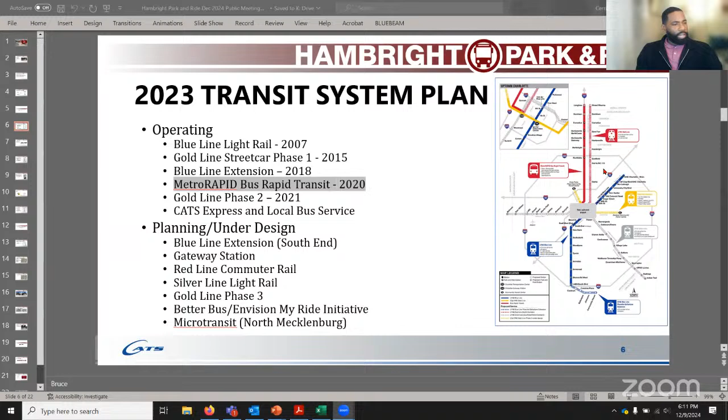Patrick, you can jump to the next one. So just to define what BRT is, this is an acronym some of you may be familiar with, but it stands for Bus Rapid Transit. The easiest way to think of it is bus, but providing the flexibility we see traditionally with some of our rail services. With a good bus rapid transit system, we have what we call dedicated right-of-way or a fixed guideway that we operate in. It's a dedicated lane or space that we can use to reduce travel times for customers. We can also use what we currently take advantage of with the MetroRAPID series, which is express lanes, and that helps reduce travel time as well, especially as we travel to and from some of the northern towns during peak hour, rush hour commute times. It is more reliable than bus service because you do have that fixed guideway, but it also provides limited stops in between. So the trade-off is the spacing is slightly further apart on bus rapid transit, but you do have more reliable service with a quicker commute time. You can go to the next one.

As I mentioned before, this is part of our overall strategy on how we can provide short-term rapid transit solutions to the northern towns. We developed the BRT plan, which includes enhancing our current level of service by providing additional park and rides that feed into direct connects, both existing and planned.

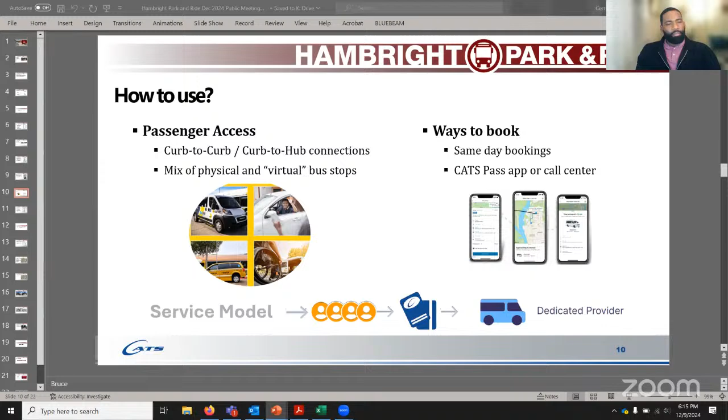We still do plan to have physical bus stop locations at some of our key hubs. That includes our park and rides, and of course the future Hambright park and ride, which will help facilitate that transfer if individuals are transferring between the BRT service and microtransit.

They'll be able to provide that first last mile connection so that you can have the connection to and from Charlotte and then also connect to your destination.

This boundary currently encompasses all of our existing Village Rider services, so routes 97, 98, and 99. With that, we'll continue to provide access to those key destinations, including Cornelius, Davidson, and Huntersville, Northlake Mall, and some of the additional park and rides.

Also, as I mentioned, to the future Hambright park and ride as well, so that we'll be able to bridge that connection and have an opportunity for individuals to connect to and from some of the express routes.

The service will operate 7 days a week. We'll initially be charging the same fare as local bus, $2.20. For individuals that are transferring to the express route, there will be a slight upcharge just to cover the cost difference. But for individuals just utilizing microtransit, it would be the same fare as fixed route, $2.20. We are saying that the wait time will be no longer than 30 minutes within the boundary.

We do anticipate wait time will be slightly less than that, but we are guaranteeing that individuals will not have to wait more than 30 minutes when they book their trip.

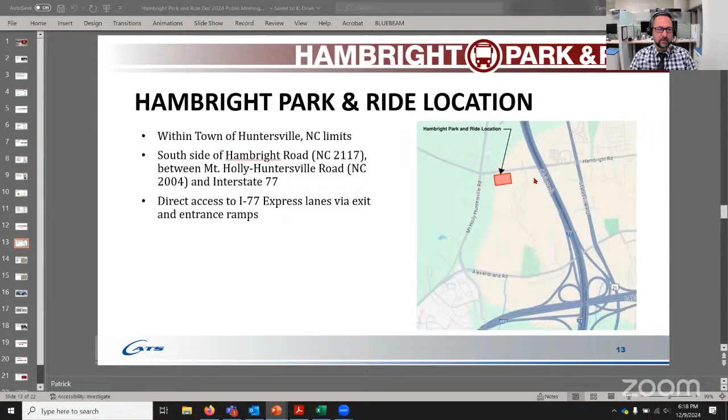So first off, let's talk about where this project is located. Here is a vicinity map where you can see the site is just north of 485 and west of 77. It is situated between Mount Holly Huntersville Road and 77, with this portion of 77 Hambright Road having direct access to the express lanes via the entrance and exit ramps.

We do want our customers to feel safe, so there will be ample security cameras located throughout the site. For an added benefit, those that drive electric vehicles will have some EV chargers in the park and ride as well.

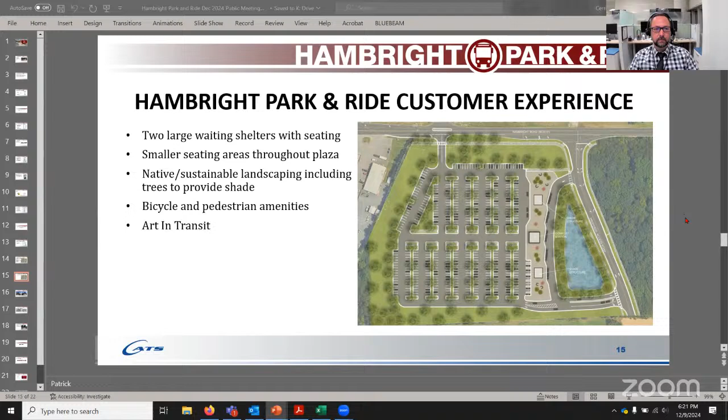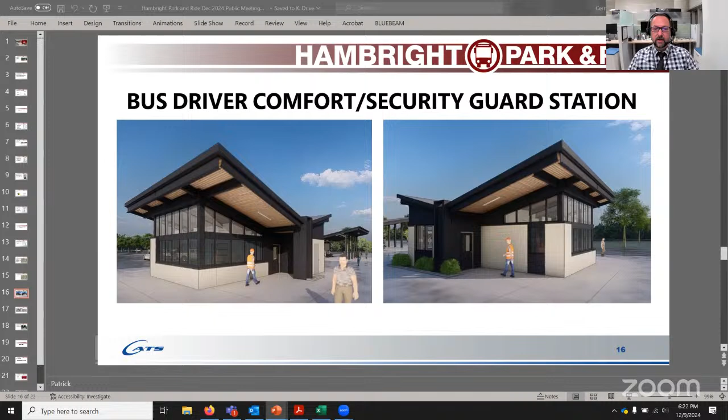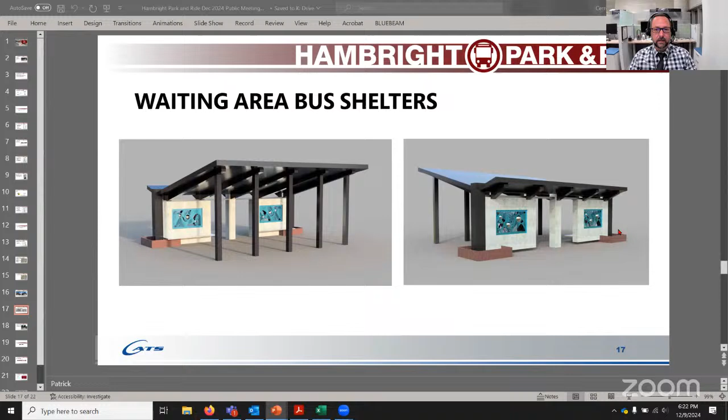So, in conclusion, this project will provide improved travel time, not having to commute in your vehicle to and from your destination. Enjoy some time working on the bus, listening to your podcast at ease, or checking emails or social media during a transit experience.

For those that do not have access to carpooling, rideshare, or do not have their own personal vehicle, this public transit project promotes equity access to make sure that those people have access to areas, jobs, events, services, and so on that they did not have access to before.

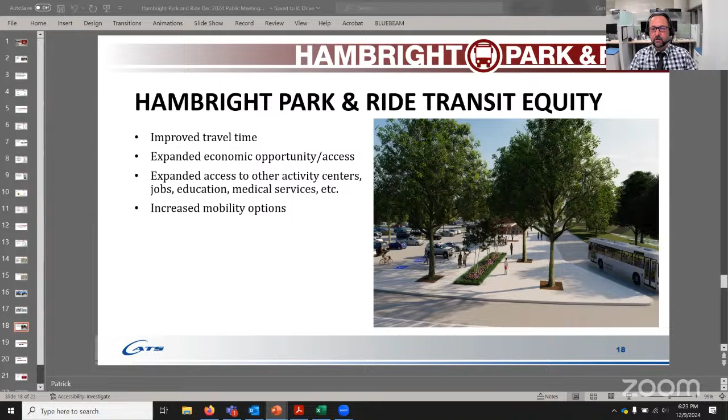So now we can discuss next steps with the Hambright Park and Ride project. This project is a design bid build project, meaning we are working with a designer to design all the project. We are currently completing 95% design through early January, with hopes to fully execute the design by early April.

Right around that time in April, we will place this project out to bid. A side note for any potential construction industry people on this call, please be on the lookout sometime in February or March of next year for this project to be placed out in early bird. You can find out more information about early bird by simply Googling City of Charlotte early bird.

After the project is placed out to bid, we are hoping to execute a construction contract by early August of 2025 and break ground and begin construction through the end of 2026.

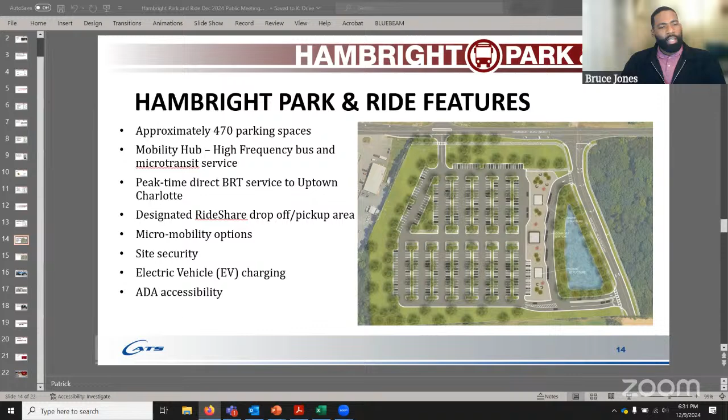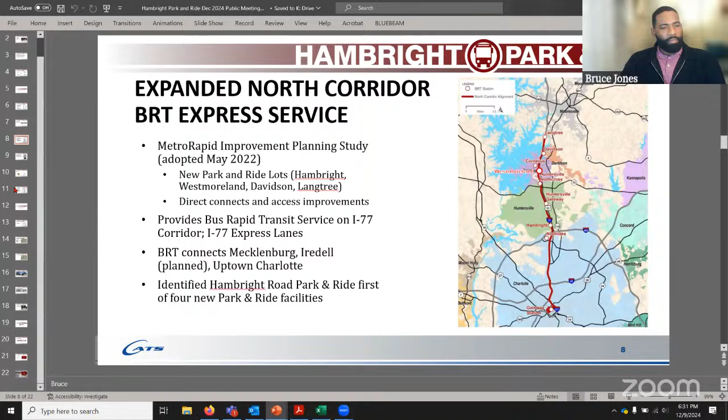Thank you, Bruce. Another question. Are they going to have Mooresville Express service back? So that all depends on a funding partnership with Mooresville. I think we've marked that as a future plan with this service. We would still have to work through what that service might look like and then also form a funding agreement with the town of Mooresville. And just to give you clarity, anytime we go beyond Mecklenburg County, we develop a funding partnership with the jurisdictions. So before we were to restore the Mooresville Express, we would have to first have that conversation and then determine what we can do with that.

Will there be a discount to use the on-demand and 63X together? 63X costs $3 and on-demand is another $2.20. So if you were transferring from the microtransit service to the 63X, you would just pay the cost difference, not the full fare for both. It would be an upcharge transfer, which would be a dollar and some change - forgive me, mental math is not my strong suit. But you'd just pay the difference between the two when transferring. And if you're transferring between microtransit and one of our local routes, like the 59 or the Route 7 at North Lake, it would be a free transfer so you can make that connection.

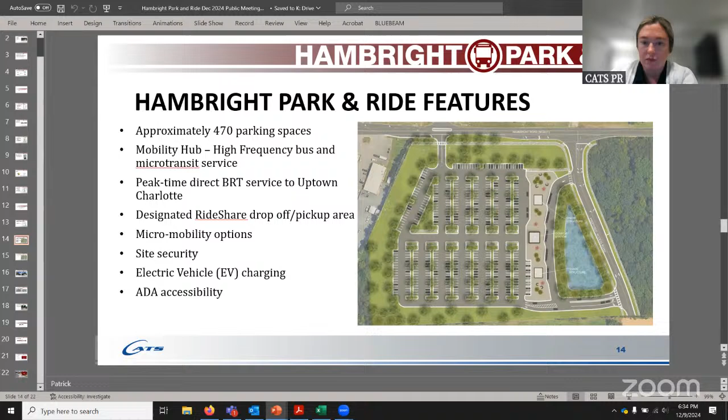Okay, we got another question. Is Route 59 going to run on Sundays during the microtransit process?

So we are looking at ways to extend service on the 59. I think it won't happen upon launch, but as we start to think of better ways to serve not only North Mecklenburg, but the entire system overall, we'll start to look at how we can implement more Sunday service.

I'll also mention, we are currently wrapping up - I believe we have a survey coming out for our Better Bus initiative. Part of that plan is looking at how we can increase frequency on all of our routes throughout the system so we can have 30-minute or better service, and also extending service to Sundays on routes that don't currently have it. So I encourage you to keep up with the Better Bus project and share your thoughts. But to go back to the initial question, not upon launch, but we are looking at strategic ways in which we can restore Sunday service to that route.